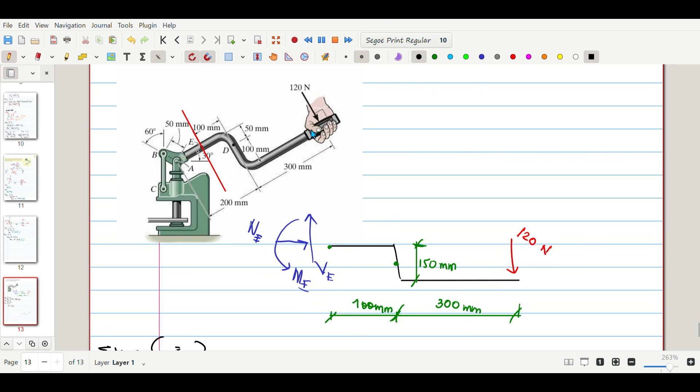So to solve this, we have to draw the free body diagram muna. So we have this, yung handle. Okay. Handle. Lagay natin. Okay. So notice na siya ay kukonect kay A. So lagay natin. Nandito si A.

And siya ay, ano yan? Pin connected. So meron tayong reaction pataas, and let's say isang horizontal reaction. And then, after point A, siya ay umangat, at an angle of 60 degrees with respect to the vertical. Ilagay na rin pala natin na itong isa ay 30 degrees with respect to the horizontal naman. So, yung kabila, lagay natin, 60 degrees with respect to the vertical.

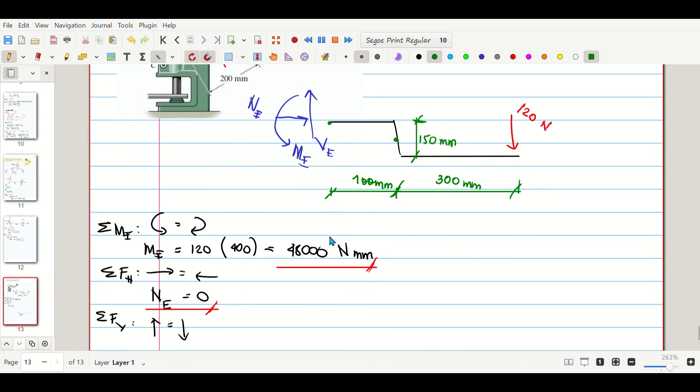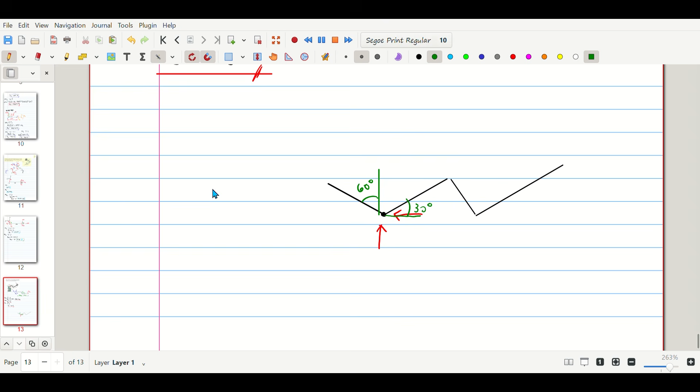So, noong unang lesson, naalala mo, this type of connection, meron siyang particular reaction. Ilan ang reaction nito? Yung BC mismo. Isa. Meron diyang isang reaction. Vertical reaction, let's call it. This is B, this is C. This is AY. This is AX. Now, sa totoo lang, dito mismo sa point B, sa connection na to, merong horizontal and vertical reaction yan, dahil yan ay pin connection.

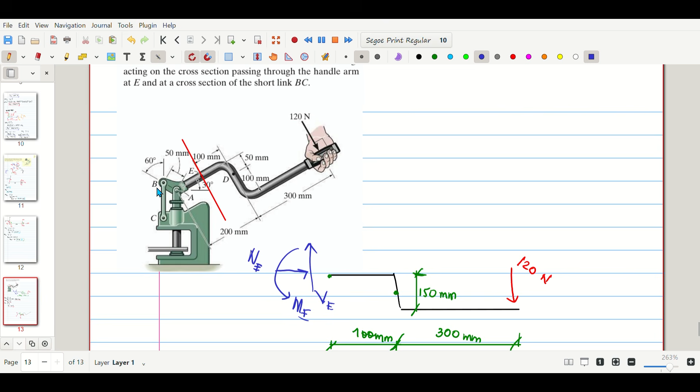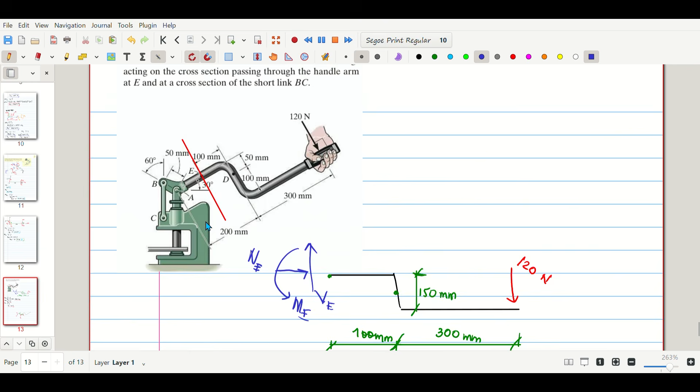Don't forget the loading dito, 120 Newton. So, ang concern naman natin is yung BC mismo. Okay?

So, para makuha itong value na to, you can do summation of forces sa X or sa Y, but notice na napakarami nating forces dito na, not so much naman. Si C, si AY, tapos si AX. But they are of, well, somewhat a different angle.

And also, kapag nag-summation ka ng forces sa Y, hindi mo pa masasolve si BC, dahil dalawa yung unknown, si AY. So, the best course of action here is to do summation ng moment at A. Okay, summation tayo ng moment at A. Let's say, pag ganun, is equal to pag ganun.

So, kung nag-summation tayo ng moment kay A, ano yung mga clockwise? Si BC clockwise, si 120 clockwise. So, from observation, we can say na si BC, mali yung kanyang magiging orientation. Magne-negative yan later on. Right? So, baguhin mo na, hindi pa naman too late para ayusin.

So, baguhin natin ang orientation ni BC. Let's make this orientation to be downward. So, kung ganun, ang problema mo na lang, dahil moment yan, kailangan natin ng distances. So, when we say distance, importante dito na dapat malinaw sa atin kung anong distance yung tinutukoy. Kapag nagmo-moment tayo, ang tinutukoy na distance is the perpendicular distance.

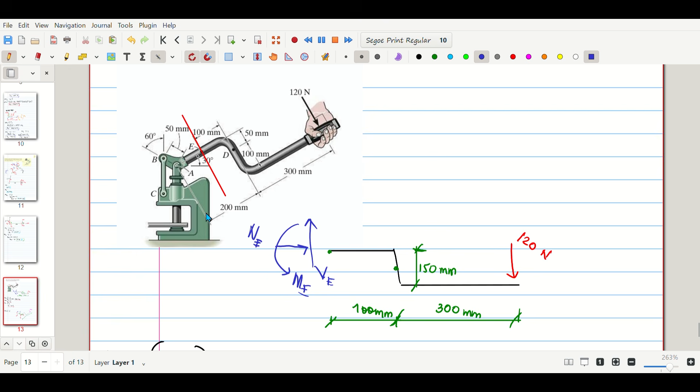So, perpendicular. So, para sa distance ng 120 kay A, itong green. And para naman sa distance ni BC, itong blue. They should be perpendicular. So, based on the given, paano mo kukunin yung distance na yan? So, from A to 120, based on the figure, nandyan ang given naman pala: 200 plus 300. From the pin at A to the handlebar, this is 300 plus 200 and it should be 500

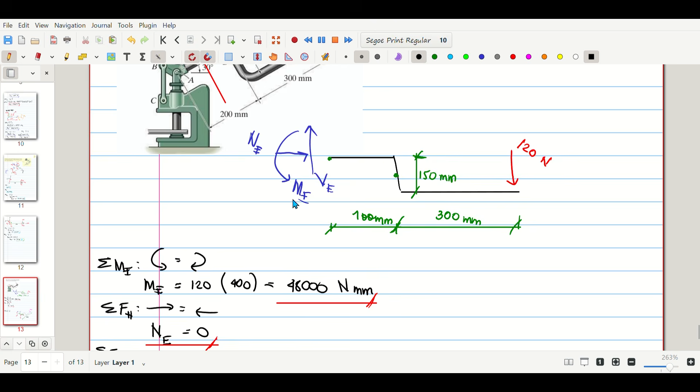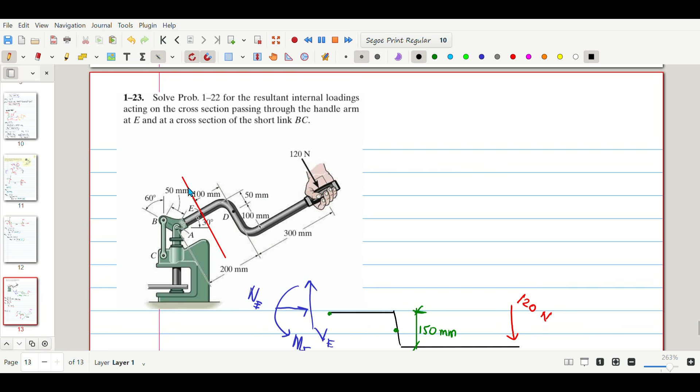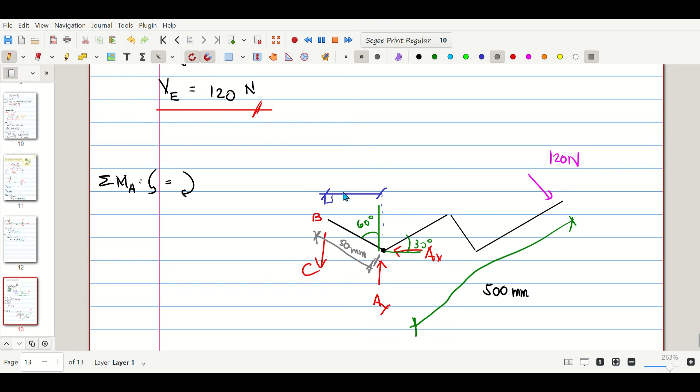millimeters. And para naman kay A papunta sa BC, observe mo, ang binigay sa atin is yung naka-incline. From point A to B, it should be 50 mm. So, ang binigay na distance sa atin ay from this point to this point. So, this is 50 mm. So, sana nakikita mo na pwede nating isolve ang distance ni BC using trigonometry. This part right here, may ma-form tayong triangle dyan.

Ito yung distance na kailangan natin. Ito yung 50. So, this is 50, and triangle yan, this is 60 degrees. This is 50, the hypotenuse of the right triangle. The opposite of the angle theta is yung distance na pinapahanap sa atin. So, para mahanap itong distance na to, yung opposite, that should be 50 sine 60. From SOHCAHTOA, wherein the cosine theta is, not cosine, sine rather.

Sine theta is opposite over hypotenuse. Hypotenuse is 50. Opposite is yung pinapahanap. So, kung i-manipulate mo yung equation, the hypotenuse should go right here. Then, you will have hypotenuse na 50 and sine ng angle na 60. Okay? So, may distance ka na. At this point, kompleto na yung distance mo. Pwede ka nang mag-summation ng moment sa A.

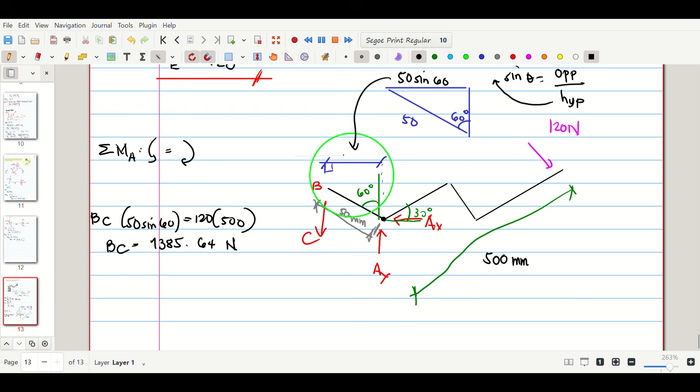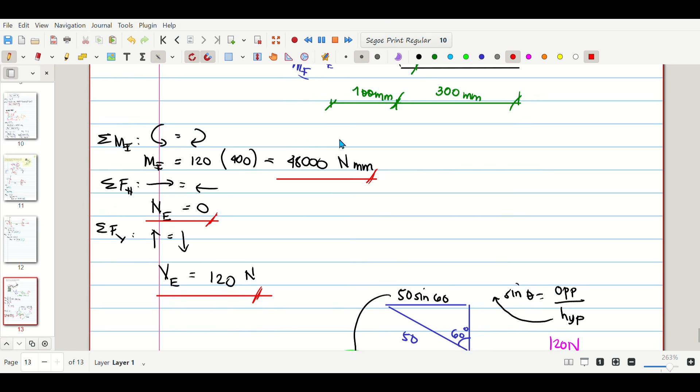1385.64 Newton. Okay? So, yan na yung final answer natin. Box mo yung sagot. Okay, so this is the axial force at BC or normal force. This is your shear at E. This is your normal force at E. This is your moment at E.

Okay? So, nakita nyo naman sa problem na to, hindi natin kinailangan kunin yung reaction. Pero, hindi pa rin kayo imamali kung sakaling unahin nyo yung reaction. Yun nga lang, extra step yan, syempre. So, you can try the one wherein you solve for the reaction first to increase your knowledge. Pero, kahit hindi na, mag-try na lang tayo ng ibang problem. Okay? So, that's it.